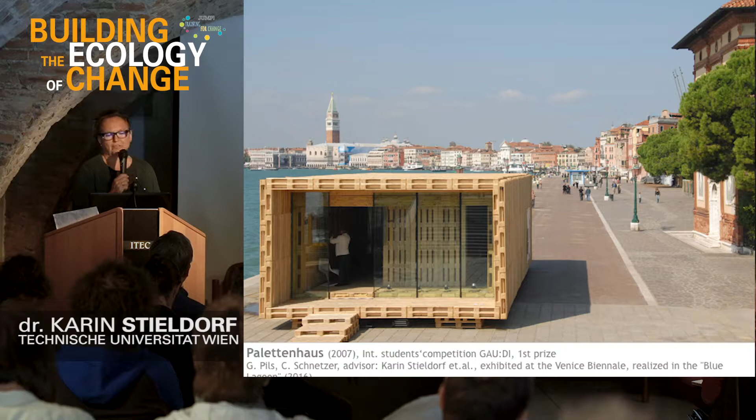Another project was built for Ithuba Skills College. A green politician launched a village in South Africa where young people are educated a bit like JUMP, to learn skills they cannot learn in schools - schools are often too expensive for them.

Christoph Chorherr started this village with the aid of different universities, and groups of students built the buildings there. This was our building, the succeeding building after the Palettenhaus. It's built from pallets, and all the materials except the metal sheet are recycled, including the wall built from clay and straw.

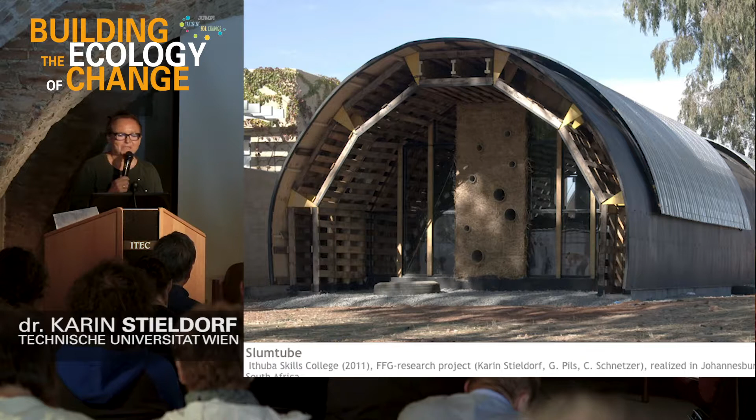The insulation is straw for this building, and the glazing was collected from other buildings. At that time, the big stadium for the African football championship was being built, so a lot of the pieces came from these building sites.

Another building, before the main project I'd like to explain in more detail, was created for Mongolia. Mongolia has a big problem: the capital, Ulaanbaatar, was a very small village at the beginning, only 40-50 years ago. The government invited nomadic people to come to Ulaanbaatar with their yurts, gave them a site, and they just put the yurt there.

But this had bad consequences - the towns spread very far and consumed a lot of land. And in order to heat in winter, they have only very small ovens, which creates very bad air quality. So we created...

The task for the students was to create a building, or a building system, that could be set up by only two people, made from small pieces that could be carried just by two people. This was also presented at the Blue Award and honored there.

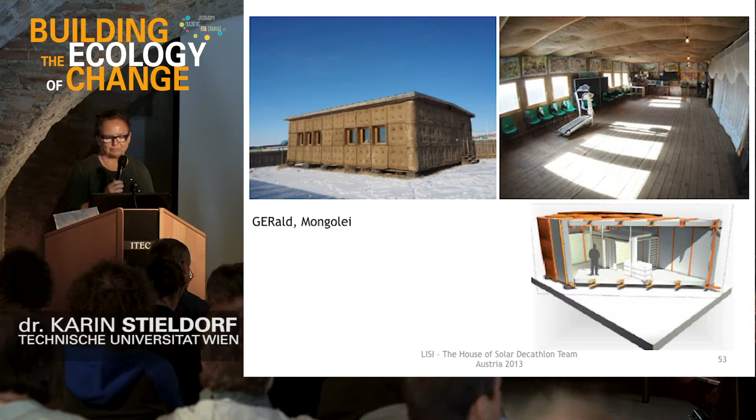I could also describe all these ideas in an article for the Architectural Digest this year, where I mainly talk about the specific period in the life of architecture students when they're really comprehensive and ready to learn about all the topics of ecologic design. I think we should make use of this period and tell students that sustainability and resilience are very important for the work.

So this is already a picture of the building I will talk about. It is LISI. It was a building developed with students for a big competition in the US. Normally, if we talk about ecology and the US, everybody thinks there's nothing happening there, which is not true.

There are a lot of people really working hard on ecologic and energy efficient topics, but there are many others—of course we know the president is talking differently, and of course there are a lot of problems, houses that are built very cheap and in a standard that is not sufficient.

And of course, they have to be run by the sun. Then they are ranked in 10 disciplines—that's why it's called the Solar Decathlon. These are the different contests; they change by time.

When we took part, it was in 2013. It was architecture, market appeal, engineering, but also communication, which was very interesting. Of course, affordability—2 years before us, there was a German team, and they needed as much money just for the transport to go there as we had in total. I think this was a very interesting change, and it really moved a lot.

Then comfort—we built for people, so people should feel comfortable in houses. Hot water, which is perhaps more important in the US, because the appliances should be chosen in the right way. Then, of course, the energy balance, because the whole building should be run just by the sun, and home entertainment.

This is a little bit how the setting looks like. You get a big book, and all the rules are in there, so you have to read it carefully, and also change from Fahrenheit to degrees Celsius—there's quite some interesting things just resulting from building in a different country.

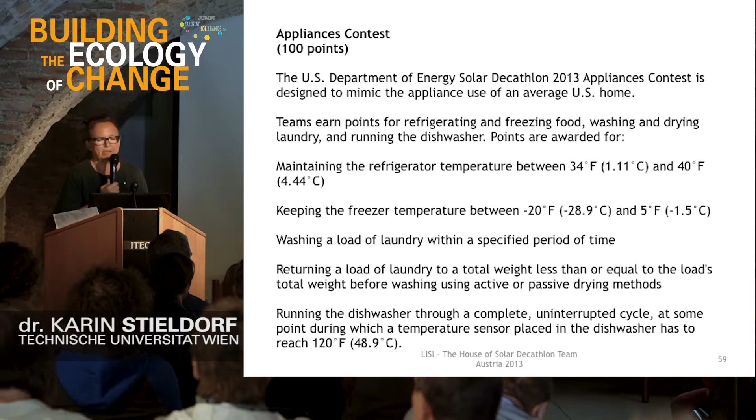We decided to have a border around the house and bring everything that was needed for the house to the US. Well, at the beginning, we were a very small team.

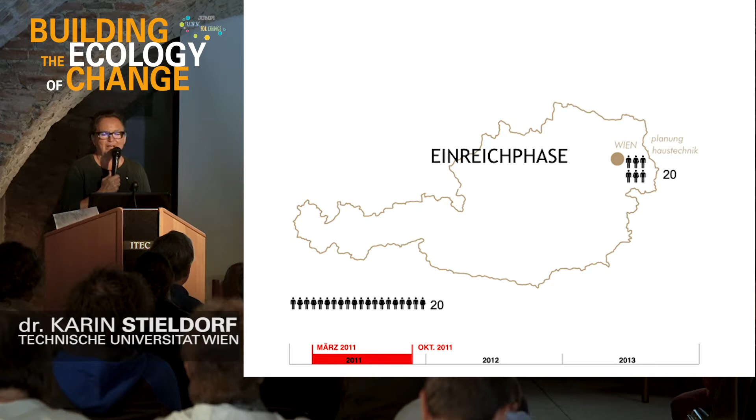There was a funny thing—it was our German colleague teaching sociology. He told me, well, if the German team could go there, why don't you? At that moment I was really a little bit frightened in front of all the work, but in the end I said, well, maybe he's right, so let's do it.

And then we set up a team not only from Vienna University of Technology, but we needed also other disciplines, so it was already in the direction of integral planning and integral architecture. There were colleagues from St. Pölten who did media and communication.

We had a colleague from Linz who did electricity, colleagues from Salzburg who cared for the wood construction. This is something we are not used to doing much. Most students do not know how to saw, how to carry materials. But in the end, not only the male students knew how to do it, but also the female students knew it very well. They liked to use the machines, they were really fond of it. And the colleagues from Salzburg, the wood carpenters, they liked to teach our students, especially the female students.

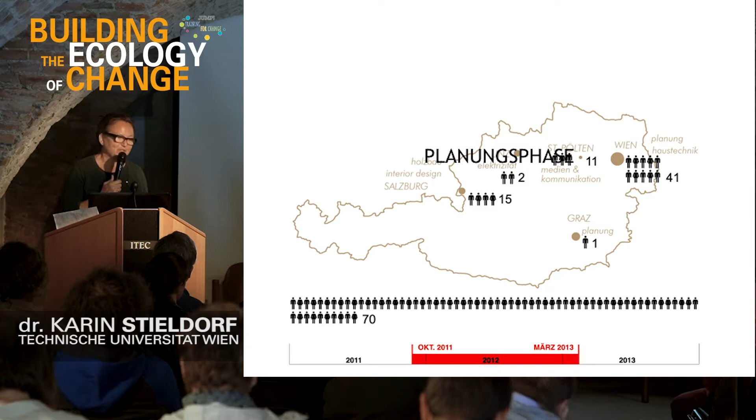So first we developed the concept. You would not believe it, but we drew this house, I think, 1,000 times until it got as simple as it was in the end.

The students also trained to work together by taking part in a female running competition in Vienna. Of course, the team grew and got bigger. There was even a student from Graz. We already worked with building information modeling, which was not that common at that time in Austria, though it's getting more common. This was, in the end, a big team which had to work together from different universities, but in the end it worked very well.

We had to look for sponsors. That was our part. Even the students were trained to call the companies and talk with them to get sponsoring. Well, then the concept.

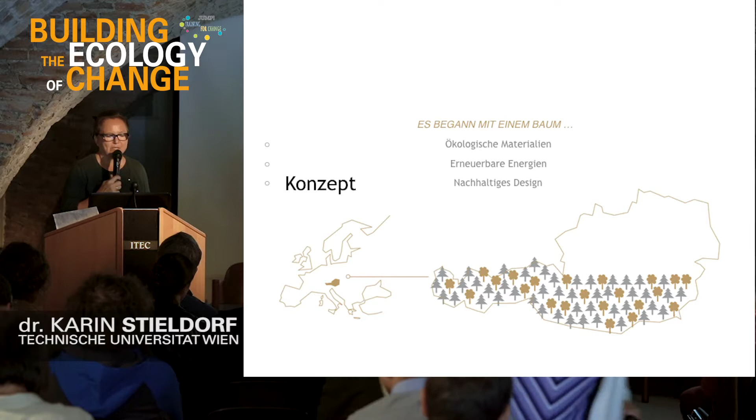We thought we would make a wooden construction because there's a lot of wood in Austria. Only a wooden building could be carried from Austria to the US. The building should be ecologic, run by renewable energies, and of course sustainable. So the main idea was to think about the tree, about the carrying and the branches, and to develop the house like a tree, so that all the parts of the tree should be used - the bark, the timber, but also the sawdust.

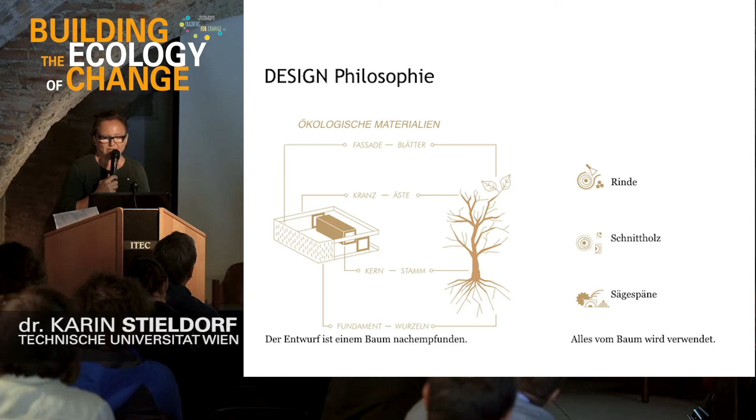The bark was also worked into cladding for the interior, the massive timber for construction and surfaces, and there was even furniture made from the sawdust.

From the design philosophy, we also said that the house should be a plus energy house. And for this, it is necessary to also work with simulation tools. I spent 10 years at the Institute of Building Physics before going back to the design institute.

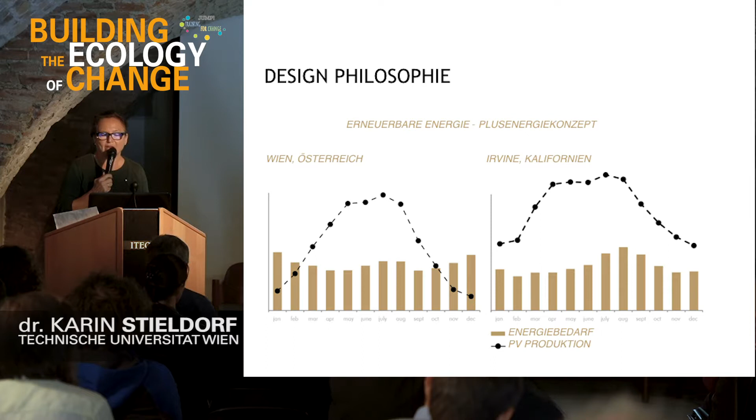It was quite interesting because we thought the house should be possible to use also coming back, and it was interesting to design a house that would also work later on in Austria. Of course, there's less energy needed in summer and winter in California for heating, but it's much more used in summer for cooling. On the other hand, when you need the cooling, you also have a lot of energy from the sun.

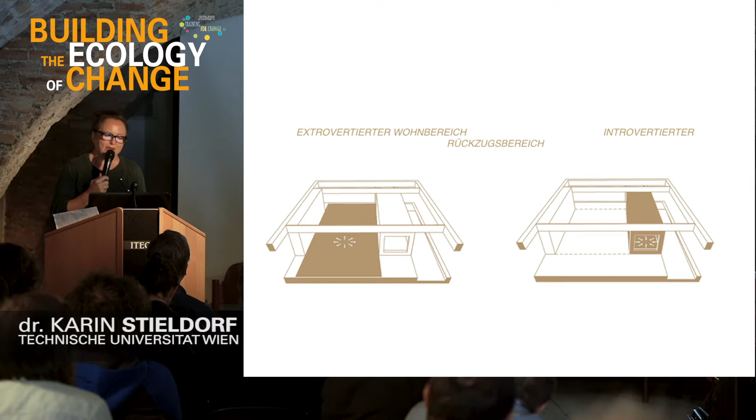So just a few words about design philosophy: it should be possible to add the building to a row, it should need only small space, it should be energy efficient, and it should be a flexible building that you could use in different ways in winter and in summer. It was a small building, so there was a very reduced sleeping area, but a spacious living area.

It could have been insulated with straw, there could have been more earth building, but it would have been too difficult to transport the prefabricated earth elements from Austria to the US and then rebuild it there, because there would have been too much humidity in the house, which was measured there.

So the sleeping area and the sanitary area were transported in one piece, and also the kitchen and storing area on the left side. The rest is just a very big, spacious area that could be opened to both sides.

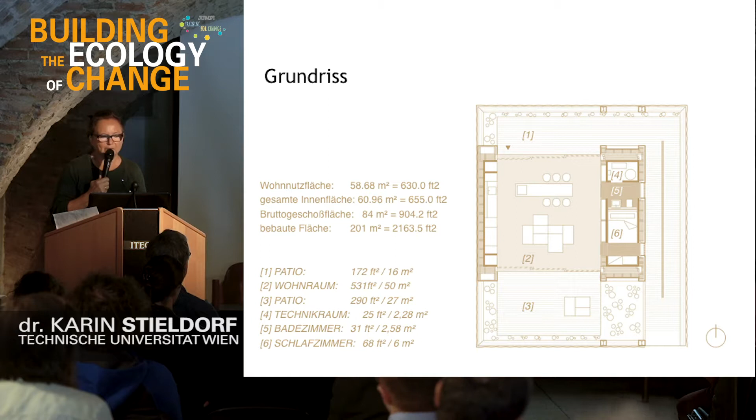A section through the house shows that you can also close the whole area, the whole house, including the patios on the south and in the north, producing more privacy by that.

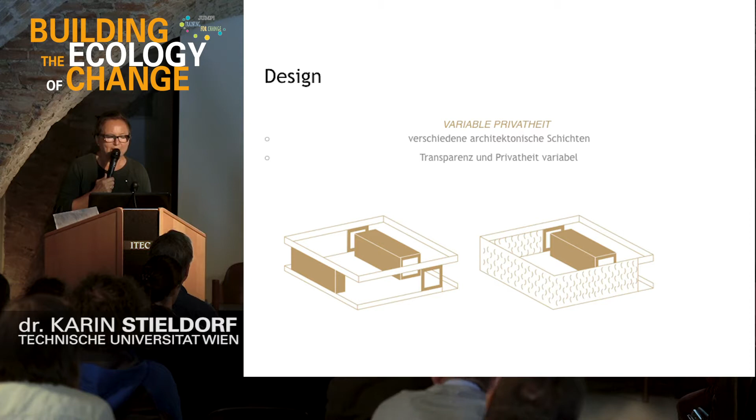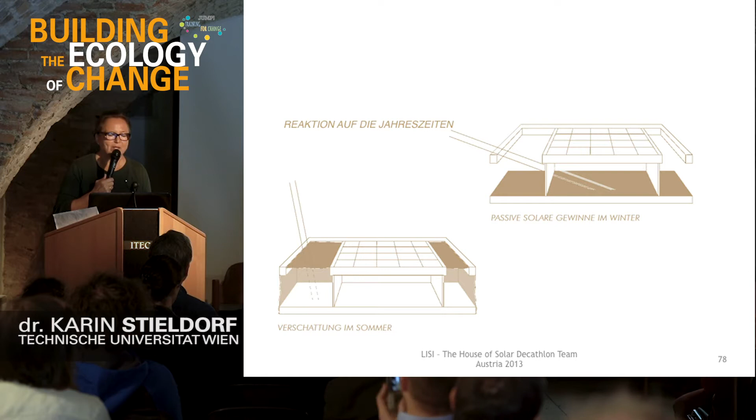Also, the shadowing on top can be put away, or it can be used automatically, so that it can be shadowed in summer and without shading in winter.

Everything was prefabricated in Austria. It is a modular system, lightweight wood construction, and it was all dimensioned to the size of containers, because, as I said before, otherwise we could not have managed, since transport has to be very reasonable.

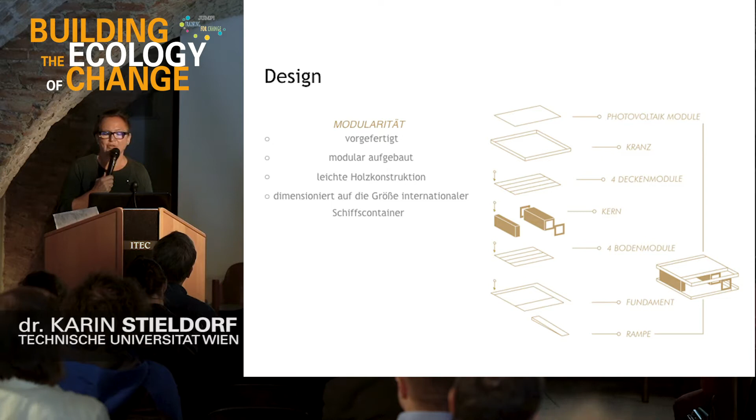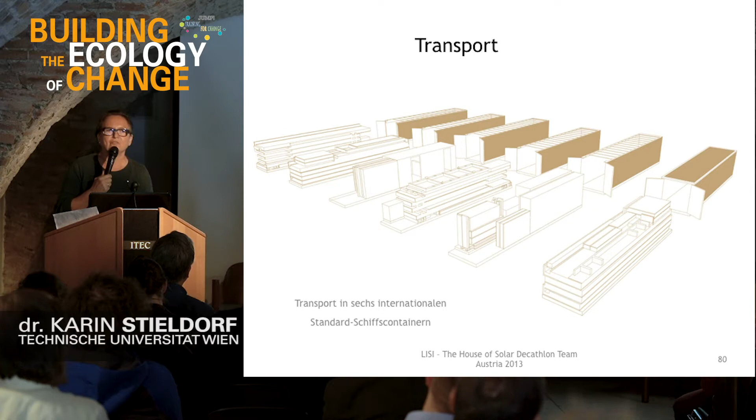We started in February. The students rent the house and learned how to live together. We could not build at the university, but in the end it turned out that it was better not to work at the university but to work in Carinthia.

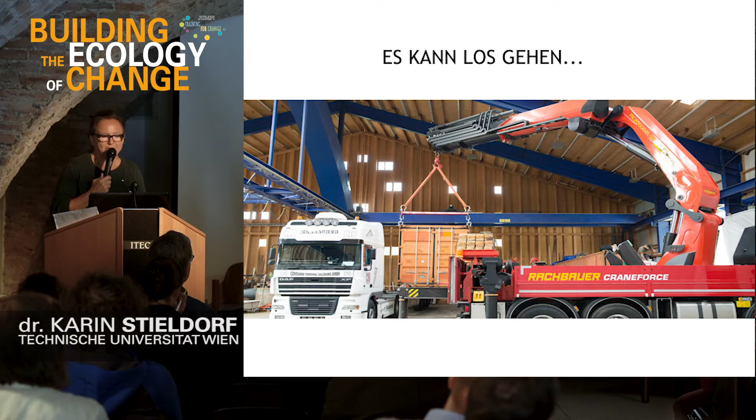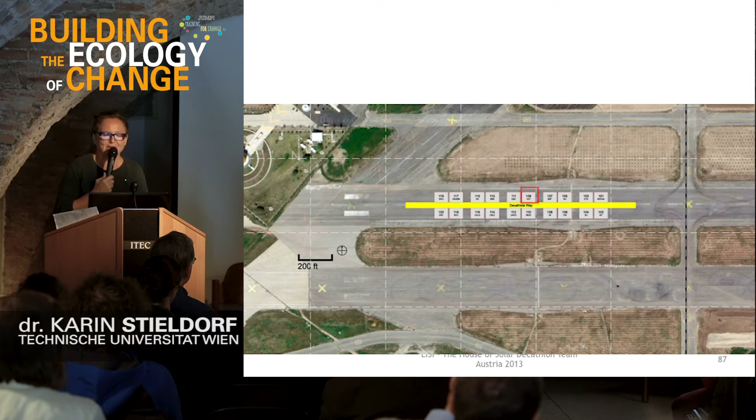So then it was put into the containers, brought to California, and there we had a site, which I chose in the north, so that people walking by saw the nice facade oriented to the south.

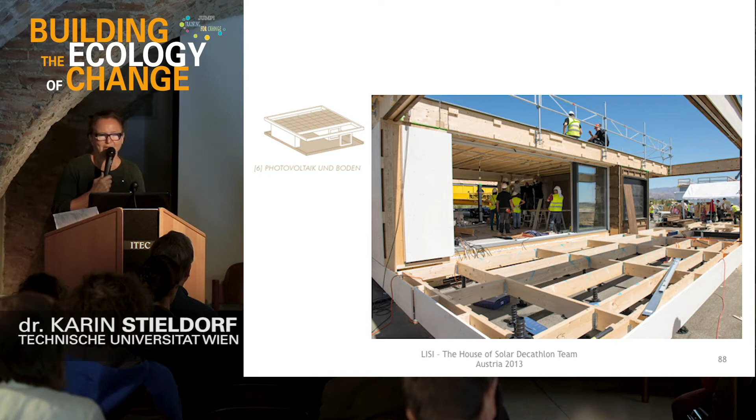There are much more pictures of the building phase on the internet, on Facebook, if I can look it up. There are many, many pictures.

But of course, also the team had to be trained concerning safety. Health and safety was very important during the building period. There we learned a lot, because normally we do not take care enough about this. We also learned to use a fire extinguisher. I never used one before.

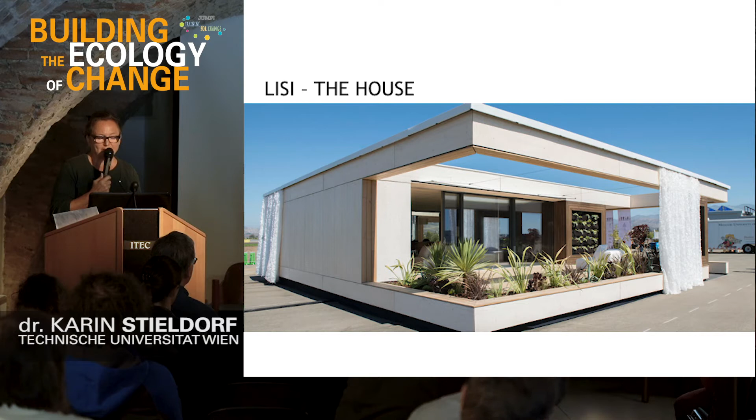So let me make just a little tour through the house, entering from the south along the covered gangway. This is the picture of how it looked in the end, also surrounded by plants that we rented from a nursery there and gave them back afterwards. The big sliding doors in south and north. People could come there and visit the house after it had been finished.

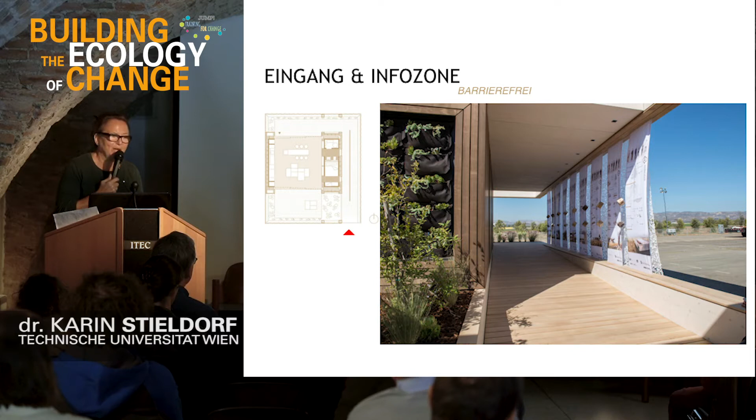This is the entering area where also the house was explained. We also see vertical farming a little bit, because even in a small size, there was no color used for the house. All was made from wood.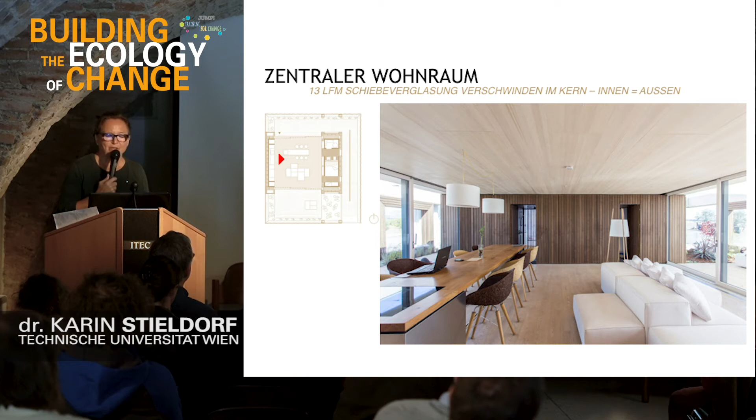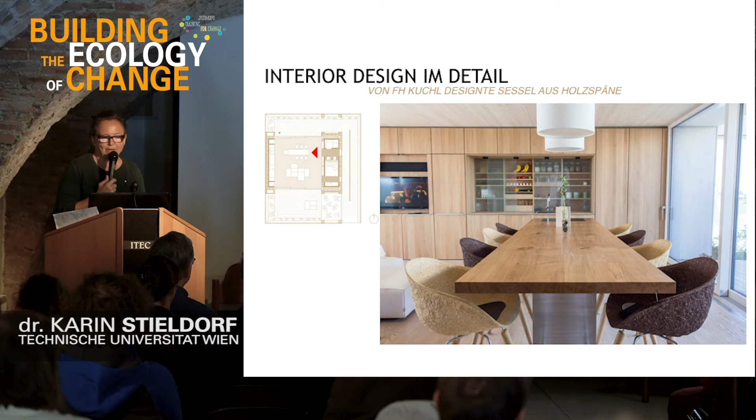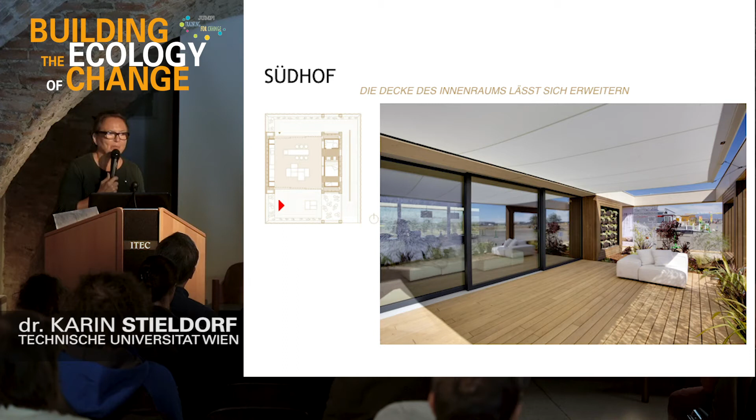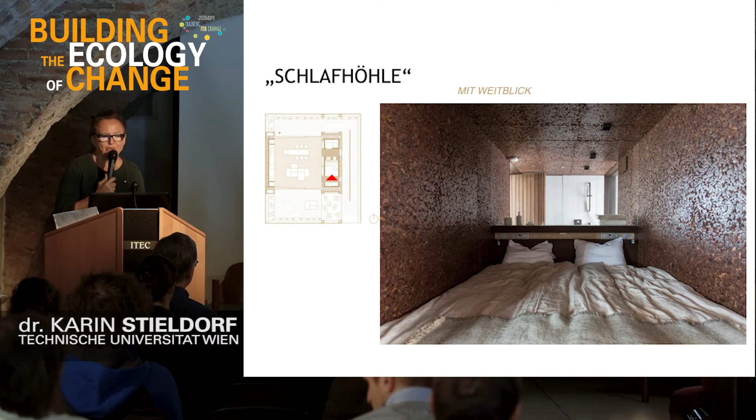Even the only picture in the house was a very beautiful table. These were the covered patios, which is an element quite common in the south of the U.S., coming from the Latin American building tradition. The bathroom connected with the sleeping room. This is the cladding made from bark.

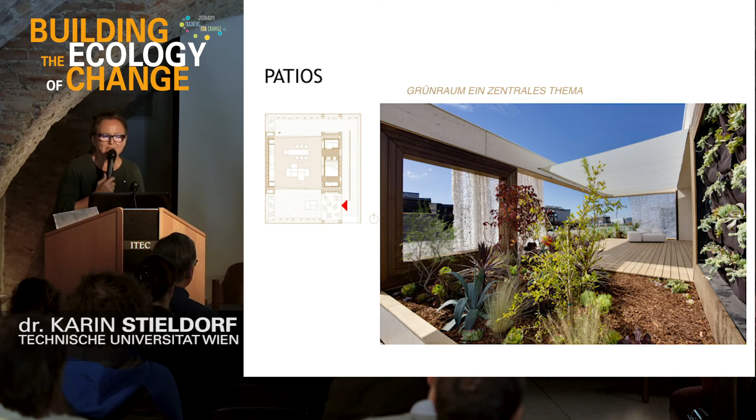In the small patios, we also had small gardens with plants from California.

Also, of course, housing technology had to be well planned and well thought over. There was a double floor, integrated ventilation, and the energy was produced by PV on the roof, not visible at first sight. There was even a shower, energy efficient shower - the heat from the used water is given over to the fresh water.

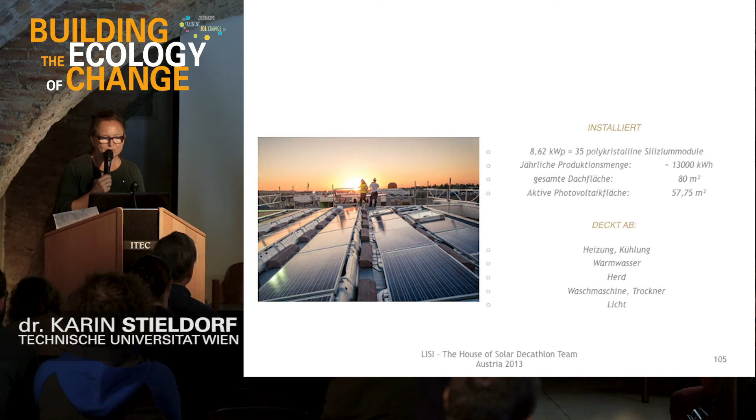This is the roof with the photovoltaic system, which supplies the whole house. Of course, simulated before, otherwise you don't know how many panels you need.

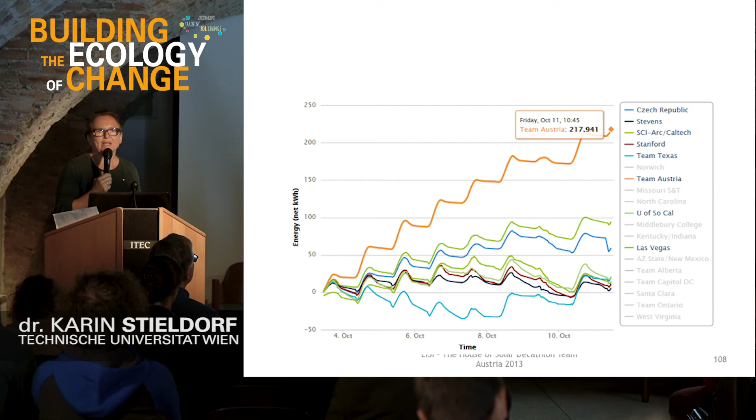This was the contest, energy contest. You can see very well that we had by far the best results. We had, of course, a very good building envelope and enough PV and a very well worked out system. It also was certified - it was the first Solar Decathlon project that was certified also by LEED, not only by Austrian and German standards. It was DGNB, the Austrian ranking system, and the US system.

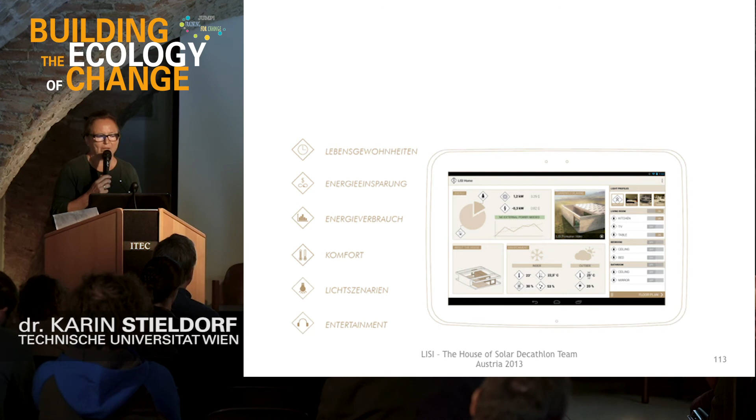So platinum and gold. And the principles were, just to sum up: ecology, economy, but also socio-functionality, a steering system also developed to work on an iPad for running the building, and of course high technical quality. We only worked ourselves - there were some other teams who had the help of companies, but we really only worked by ourselves.

Following very well, having a very well worked out strategy before. Which was interesting was the scaffolding, much admired - we were the only team who had that modern scaffolding.

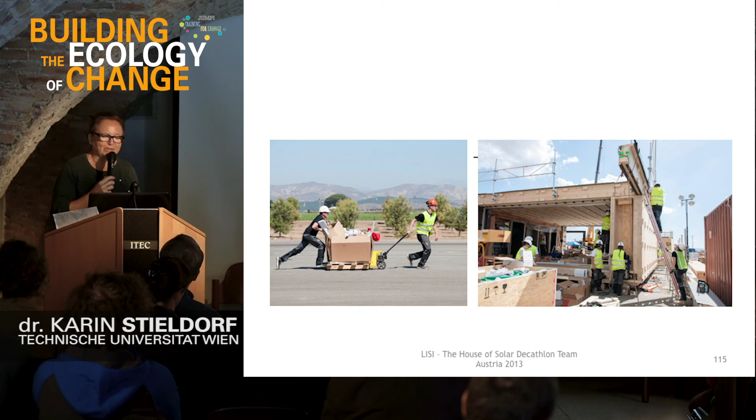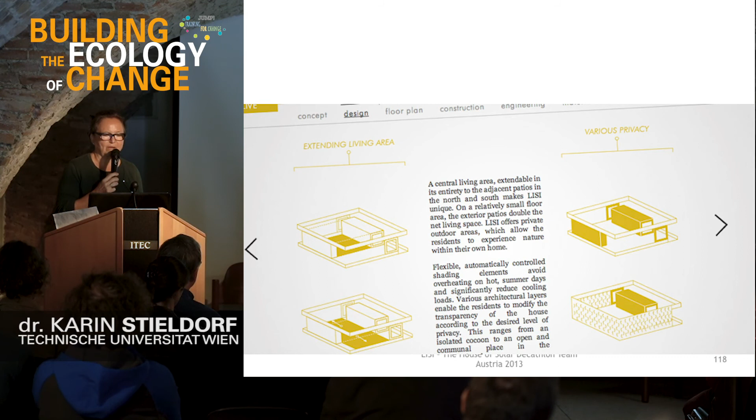Media and communication, we had branding, which was very important - a good name and a good branding. It was then opened, and the son of architect Neutra visited us, so we're very proud about that. We are, of course, present on the internet, on Facebook and on a homepage.

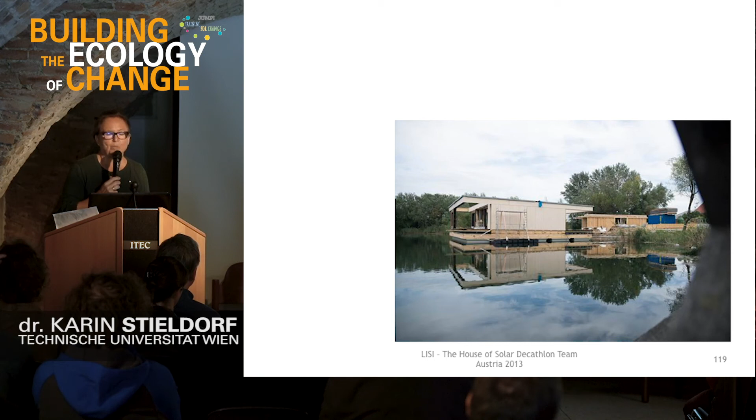Afterwards, we reconstructed the house in a prefabrication area south of Vienna, where you can also visit it. And now I run really over it - there's a small catalog now developed with different sizes. Sorry, the wrong slide. 60 square meters, 80 square meters.

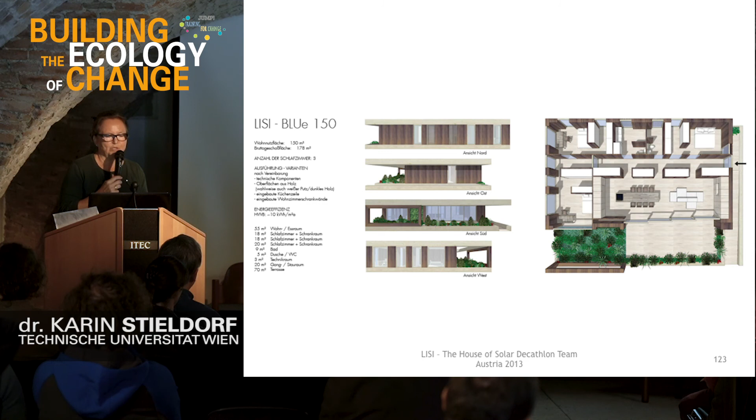LISI Blue, because of Blue Lagoon. 120, 150, and also 2 levels. It was not that easy to keep the style also for other sizes, but also optional other, so you can also do it. There's also a DIY version already.

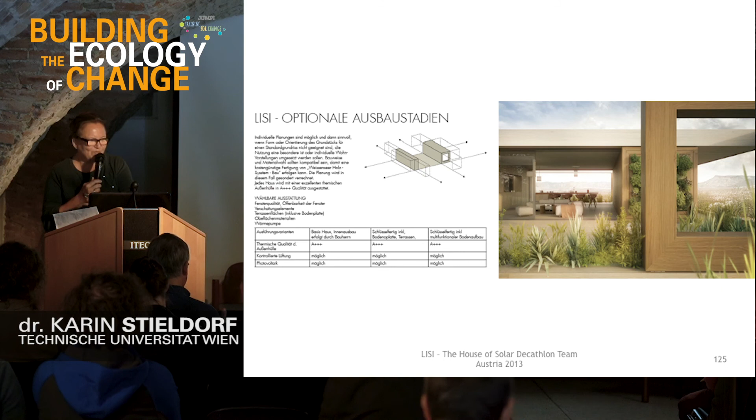And only a very few slides at the end, how I started to get into the topic. There was an excursion to Mali nearly 20 years ago, 17 years ago, where I met for the first time how to work with earth. This also was our first workshop with students - they could take part in the building of the French Culture Institute there, and first mount a scaffolding to work on a wall.

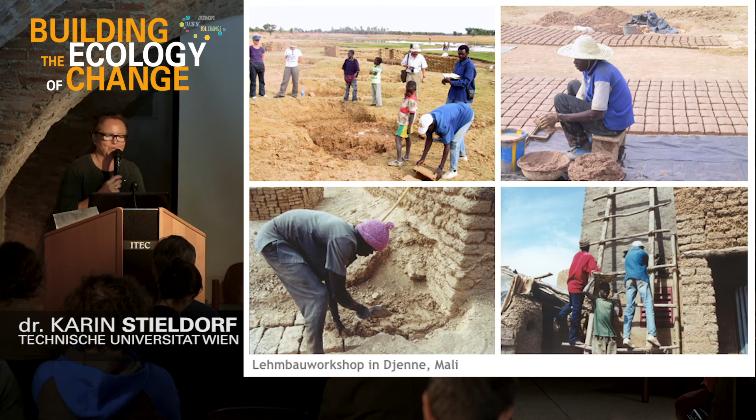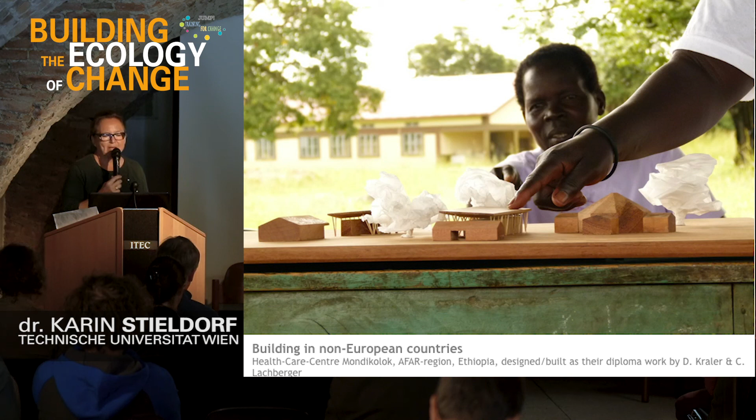These are the last slides. It's a project - also, we have a design course for Ethiopia, and one of the projects was really built by 2 students.